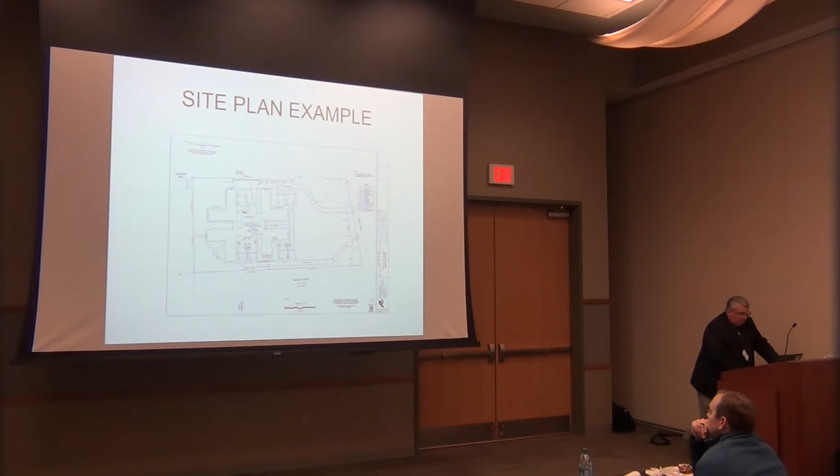The site plan again shows the location of the project. This is the senior living facility north of Cincinnati. I don't see a lot of utility information on here.

But by the time I get to my grading plan, I can see the stormwater pipes are shown on there, because usually this is a grading and drainage plan, so they're trying to help us understand. It looks like all that water is going to end up in that retention pond at the northeast corner of the plan, which I think is plan northwest.

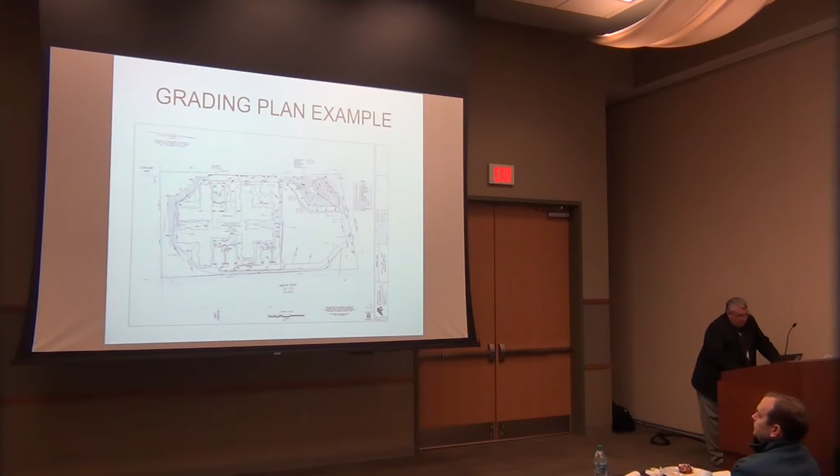So I can get a little bit of that information that I need. But now I'm on my utility plan, so now I can really see the layout and alignment of not only my storm sewer pipes, but my water and sanitary are in here as well. There might even be, it's kind of hard to see, but there's electricity coming off this pole right here into the site. So I can do the takeoff on that.

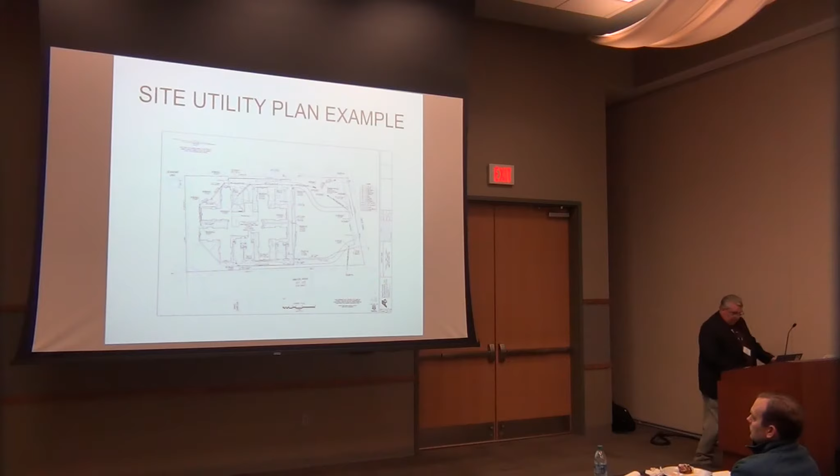So I get my linear dimensions on here, but my depths, I really want to rely on my profiles to get my depths. This really matters, because when we're putting pipes in the ground, we want to know how deep we have to dig. Because in theory, if you're digging a 12-foot deep sanitary sewer, it's going to cost more than a 6-foot deep sanitary, right? We're going to spend more time digging and less time putting pipes in the ground.

Really common sense principle. But what also matters is that soil type. So if we're digging through, let's say, real rocky soil, it's probably going to take us longer to dig through that than maybe through a clay soil. So we may not have to worry about over digging, because the vertical part of the trench is going to be easier to do because it's rock. It's going to hold itself in place together. It's going to take longer to dig it, but the trench is going to hold itself in place.

If we're digging through a granular or a sandy type soil, what's the problem? It's always going to want to cave in on itself, because granular material doesn't hold itself together. It's a function of its moisture content and a lot of other things, like silt content. So if I'm constantly having to re-dig that trench, that's a lot more digging that I'm going to have to do, but it's also a lot more backfill that I have to do as well. And even if you can use the same material as backfill because it's granular, you still have that much more time.

So everything really comes down to a function of time. So I want to know how deep my utilities are. That's a big thing for me, is how deep are they? Because the shallower they are, and the more competent the soil, the faster I can go.

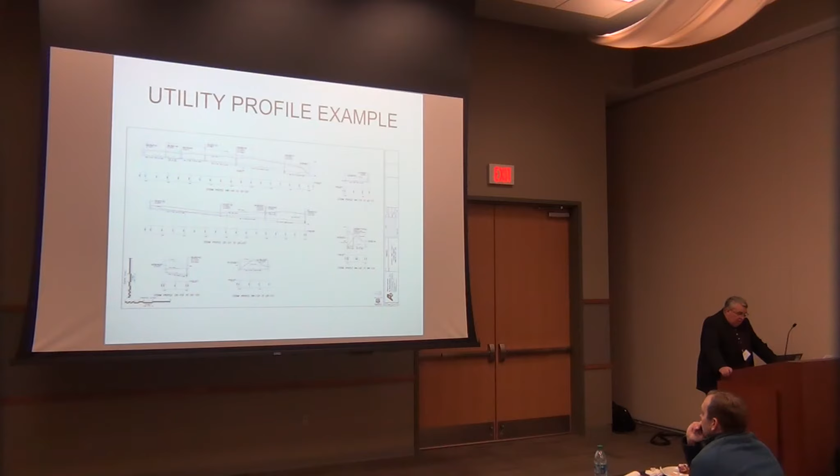These are drawn with a horizontal and vertical scale that are oftentimes different, but it would allow me to calculate my trenching volume, though I can't get my complete trenching information off of here. You say to yourself, yeah Dan, you can get the length of your trench and you can get the depth of it off the profile. What's the missing dimension?

I got length and I got depth. What am I missing? Yeah, the width of my trench. And what's going to impact the width of my trench? The soils. What's the first thing that's going to impact the width of my trench? Pipe size, right.

And then I've got to leave myself room on either side of the pipe to work, right? I can't have a 24-inch pipe and a 24-inch wide trench. There's no room for a pipe layer to stand in the trench. So I probably need maybe 1.5 or 2 feet. So whatever my pipe size is, I can add at least 3 feet to my trench, right?

But that's going to, again, depend on soil type, because if the soil is competent and holds itself together better, I can do that. But if that soil is not competent, and I fear that it's going to cave in, I might put a box in there. Even if it's shallow, I still might put a trench box in it to hold the walls up while I put my pipe in.

But if the soil is such that it's dangerous to put somebody in there, if it's deep enough, OSHA says it's 4 feet, right? So if it's deeper than 4 feet, I've got to have shoring and I have to have a means of egress.

If I'm putting a box in there, the first thing that impacts the width of my trench is how wide my trench box is. So these are all things you have to think about. But it really comes down to soil type as well. Size of pipe and soil type, because that's going to really inform how wide your trench is.

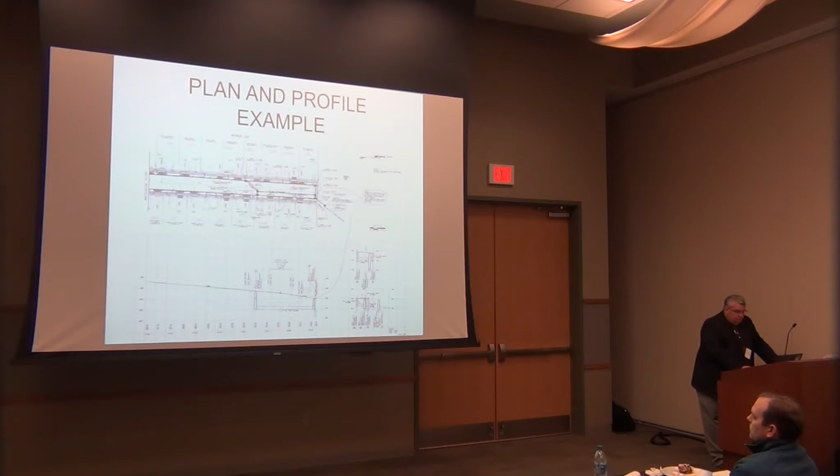Anywho, when you go to buy the pipe, your pipe is sold in different lengths. A ductile iron pipe for water mains is sold in 18-foot lengths. HDPE pipe, which is high-density polyethylene plastic pipe, we normally see it for storm sewer. That is sold in 20-foot sticks, dimensions.

So you may end up having to buy more pipe than you actually need for your trench, because you might have a piece that requires 1.8 sticks of pipe, and you're not going to buy 8/10 of a piece of pipe. You're going to buy the whole piece, right? Yeah. So it'll help you get the accurate dimension of how much pipe that you need.

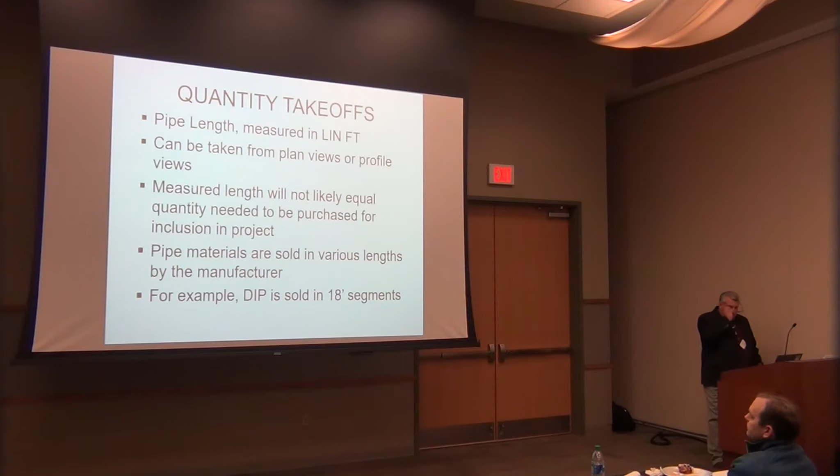Well, let's jump back to the trenching excavation and how we get there. So we'll kind of talk about this a little bit. There are different trench shapes or trench types that we can use to offset the depth to make it safe. And those include straight trenches, wye trenches, vee trenches, benched or stepped. I'll show you all these in just a second.

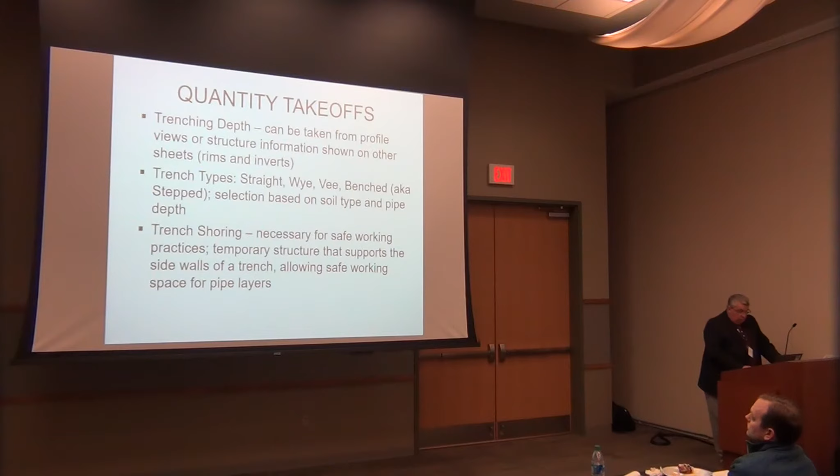Or we may have to put a trench box in there to keep things safe, and I've got a picture of that coming up. So there's a step-by-step process to get our trench volumes. The first thing is... and I don't know why it skipped step 1. What the heck?

There it is. So first of all, we're going to determine what type of trench do we need. What shape does it need to be in? And that's going to be informed by depth, soil type, size of pipe, lots of those things.

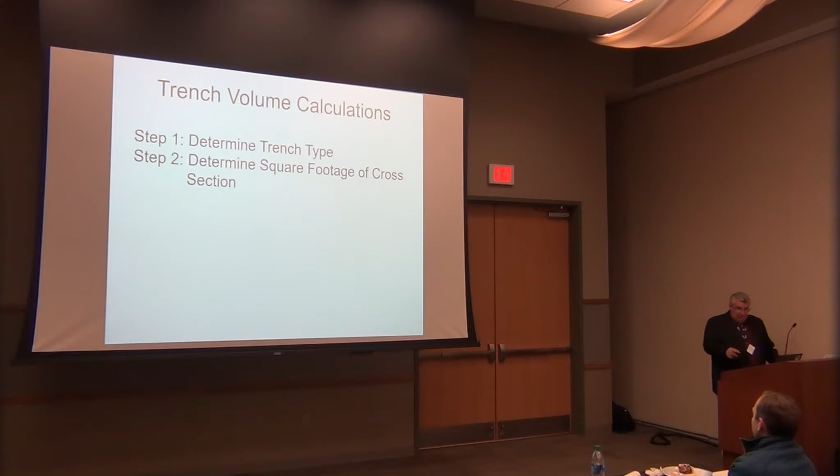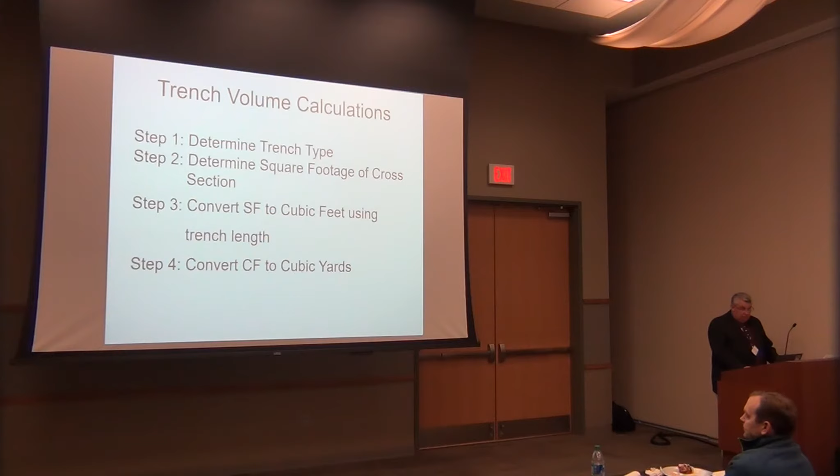Once we know that, then we're going to try to get the cross-sectional area of that trench. What is the area of that trench in cross-section, so we can multiply it by the trench length to get square foot to cubic feet. So once we have feet times feet times feet, we've got cubic feet, and then we know how much excavation we have, and then we also know how much backfill we need prior to backing out the pipe.

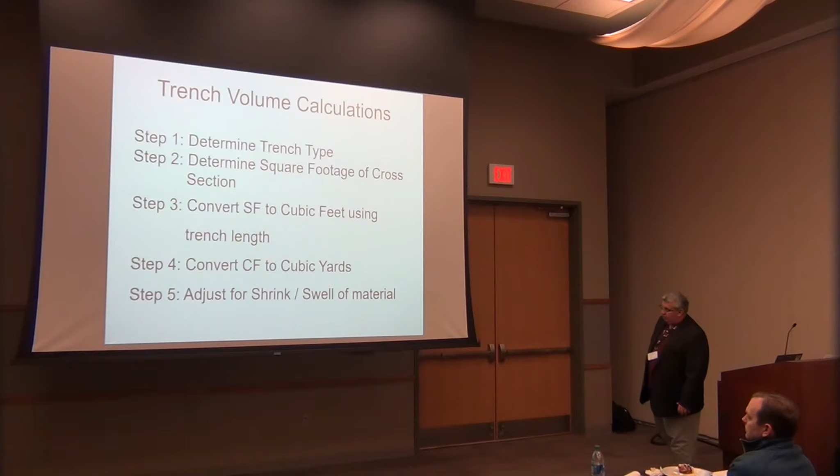Those are kind of showing up on my screen here, so it looks right. Okay, so how about if we... and then you're going to need, just like in mass excavation, you're going to need to adjust for shrink or swell. That matters as well, especially on the backfill side.

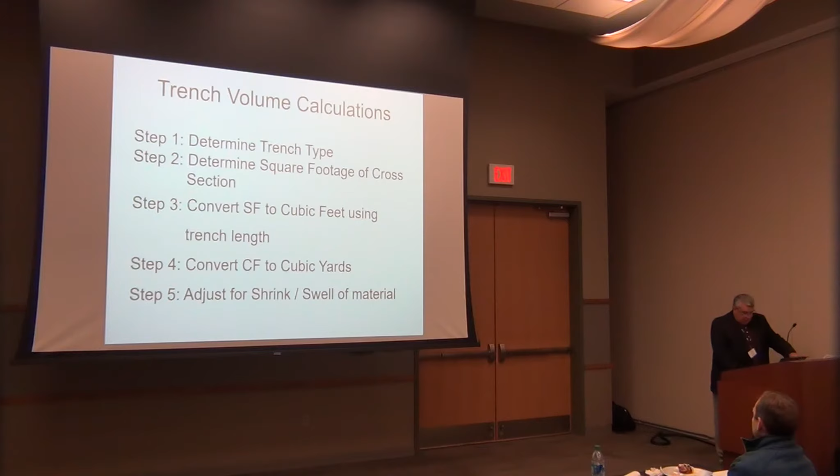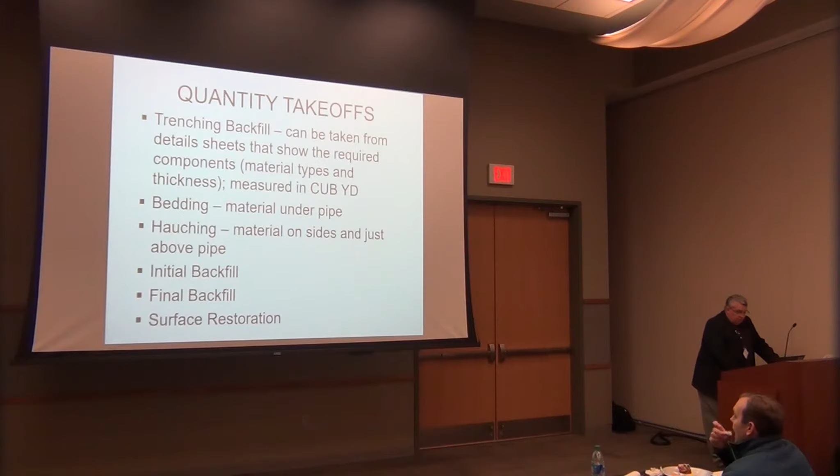So let's look at some trench types, okay? First of all, the main parts of a trench: the backfill is going to be the bedding, the haunching, initial, final backfill, and then the surface restoration. And the next slide shows that pretty good.

So we have the pipe sitting on some type of bedding. So even if our pipe is shown to be at one elevation, we have to over-dig the bottom of that trench to put the bedding in, right?

The specs might say set sewer pipe on a 6-inch bed of mason sand or something like that. So that's not going to show up on the profile as an invert. What's going to show up is what the invert is, what the elevation of the bottom of the pipe is. So we have to make sure that we account for that overdig.

That initial backfill right around the pipe that really holds the pipe into place, the engineers call that haunching. And then above that is the initial backfill. So that haunching and that initial backfill will completely surround that pipe and keep it into place. They're probably going to be something granular.

It's going to be something that you can compact depending on the trench width. It could be a plate compactor, it could be a walk-behind roller compactor—they make those pretty skinny. Or if it's deep enough or wide enough, you might be able to get a whole regular size compactor down in the trench. So you're going to put some compaction on it, and then above that is going to be your final backfill.

And again, you'll look at the specs to do that. The specs will probably refer you back to the drawing where there will be a typical backfill utility pipe section drawing that is unique to that jurisdiction.

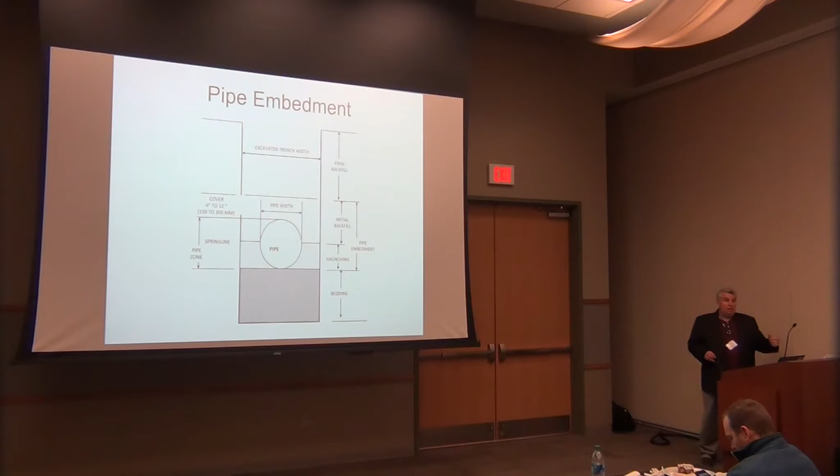So you have to worry about how much trench excavation I've generated, and how much of it you're going to use for backfill. And then whatever's left over, it's going to go someplace, right? Maybe it's going to go to the mass fill in the job, or if it's an export job already, you don't need the trench spoils for the mass fill, you're going to pay to get rid of it.

So those are the different components of a typical trench backfill. We've got bedding, haunching, initial, and final backfill.

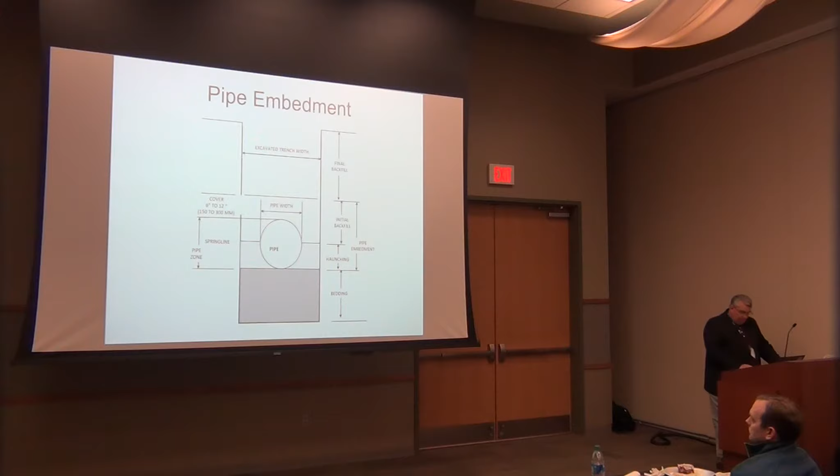Okay, any questions about that?

So it's a pretty straightforward trench. You wish every trench could be a straight trench, because now you're digging a certain width and a certain depth, and it's simple. But not all trenches are this simple—most of them are not.

Pretty simple concept. The thing I love about estimating, the math anyway, is that I don't really have to have been a math major in college. I don't really need to know that much calculus. I need to know some geometry. But most of the math that I use as an estimator, I probably learned it before I got to high school. It's pretty simple—the math is pretty simple.

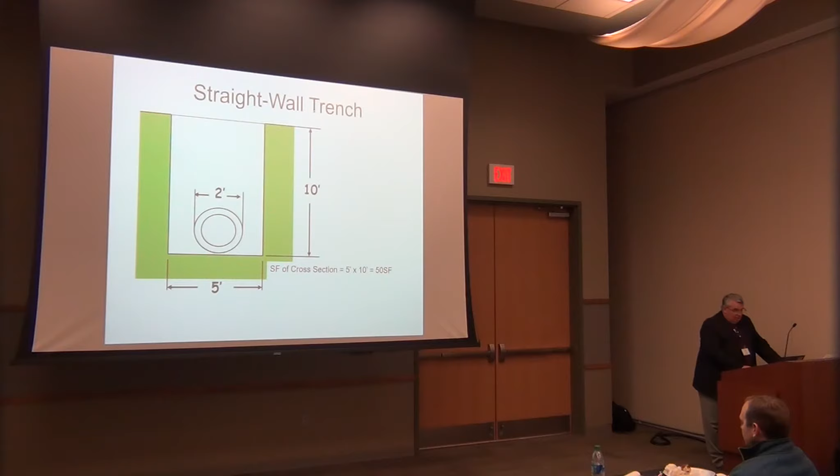I like that about estimating. And even though I consider myself a math guy, I'm not a high-level math guy. I'm a low-level math guy. That's what you need to be as an estimator.

Okay, here I just had to hit the button that would have done the math for me. So it's on the slide already, I forgot that I put that in there. So anywho, that's how you do that.

So that's a straight wall trench. That's way too deep to put anybody in. We would have to have a trench box for that.

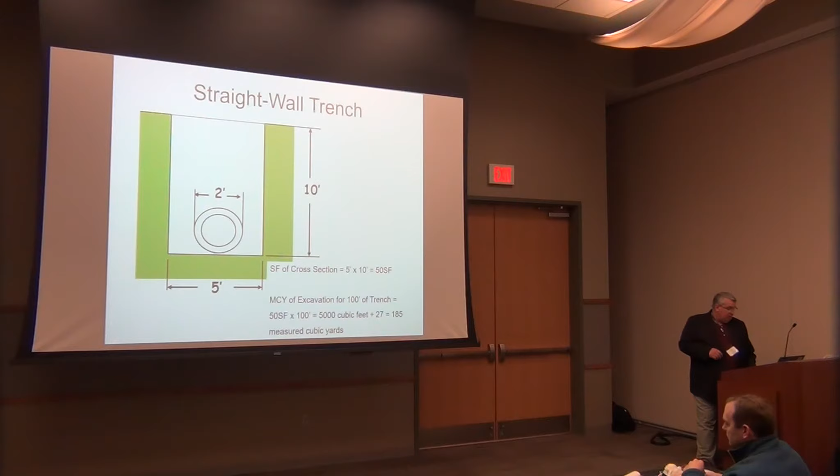Now, one way to mitigate that is to shape that trench. My sides aren't vertical here, right? So now I made a V out of it, and I'm going to make that into some sort of a shape where it's not a straight vertical wall. And now I'm going to worry about what my soil type is, depending on how far back I can over-dig the top of my trench so the wall isn't vertical.

That would be a function of soil type. A nice lean clay, you could probably get away with something that's not too expansive. None of that yellow clay or fat clay, that probably wouldn't be real good. You could probably get away with something like this if it was a mixture of lean clay and maybe some rock.

But again, if I'm 10 feet deep, I've got to have some way to protect the workers in that trench. So I'm going to keep emphasizing that.

And again, now the math is a little different. Now I've got my overall rectangle, but now I've got pieces of 2 triangles to do as well. So I'm getting my trench cross-sectional area, and then I'm going to measure it by however long it is. You guys get the picture.

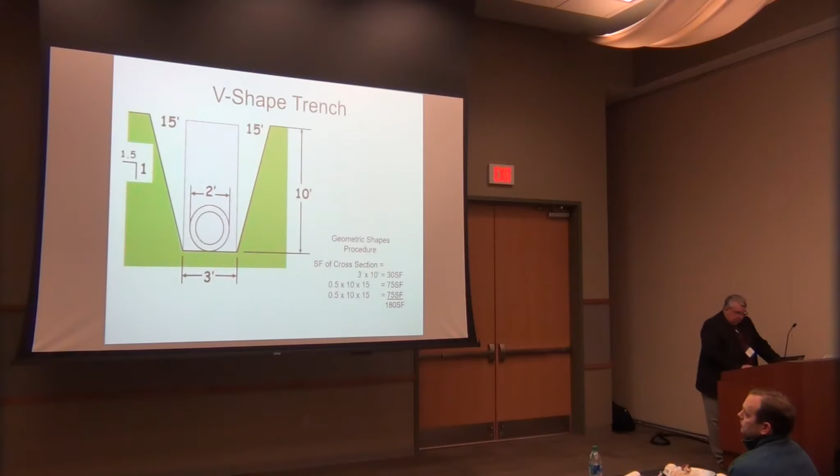My next trench method is a Y. I've got a vertical piece at the bottom. They show 5 feet here, but if that vertical piece at the bottom is 4 feet, I theoretically don't have to protect that because the vertical component is only 4. But now I've got a bench in there. I've got a 2-foot wide bench on each side, and then I'm going up at some sort of a ratio.

So now my math gets a little more complicated. This might work for me. So now my math is a little different. Now I've got a rectangle, and then I still have—actually I have 2 rectangles and 2 triangles. So I've got four individual things to measure there.

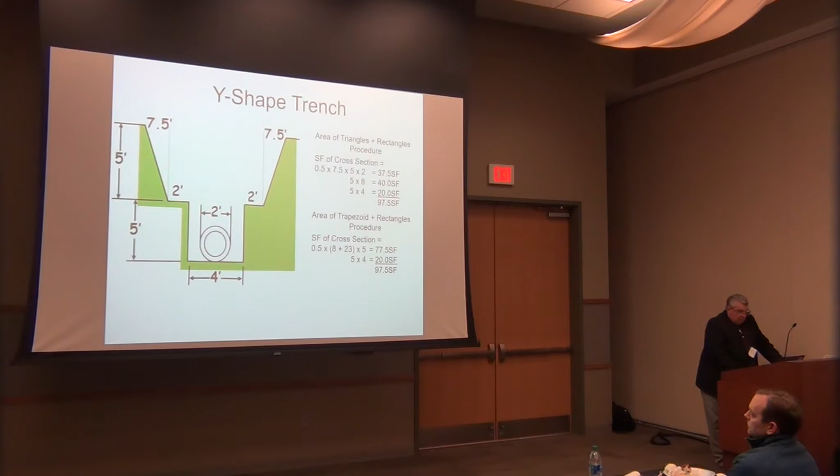Now I've got a T. Now I've got nothing but vertical components of this. I've got a really wide bench on this. I don't know why we've got 9 feet in here. Obviously, I ripped these off from somebody, with their permission, of course.

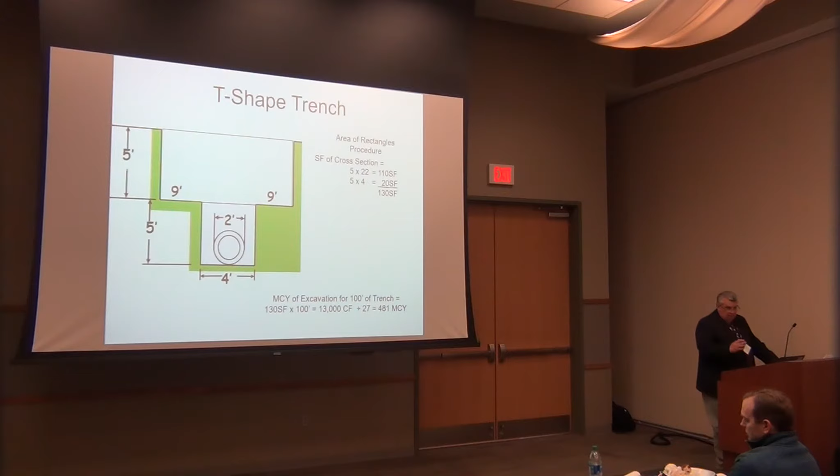So, but these are the dimensions that we have. So the bottom line is we've got to come up with that cross-sectional area and then multiply it by the length of our trench. Real simple stuff. Any questions about that? In reality, how are most trenches dug?

Most of them are either benched or they're straight with a box. Is anyone going to take the time to dig something like this that's real elaborate? Now, you might if the job really dictates it, but what's the fastest and easiest thing for a contractor to do? It's just a straight trench with a box in it.

And let's say your box is 8 feet tall and your trench is 12 feet deep. Now I've got 4 feet above that. What do I do above that? I'm going to lay that back, or I'm going to bench it, but now my extra excavation is minimized because I've got the box in there.

But what does the box do, other than keep people safe? How does it impact our cost? Rental rates, yeah. Everybody doesn't own them. If you don't own it, you've got to rent it, but what does it do to your production rate? It slows it down quite a bit, because now I am pulling that box forward in the ditch.

And what's the right way to do that? Is it to pull it forward? Is it to pick it up and put it back down? It really depends on the job. It really depends on the foreman and crew as to the right way to do it.

I want to tell everybody a quick horror story. And this isn't really funny because it involves somebody losing their life. But there's a friend of mine in Cincinnati who works for an excavating contractor. He was their estimator when this accident happened. The crew was pulling the box forward in the ditch.

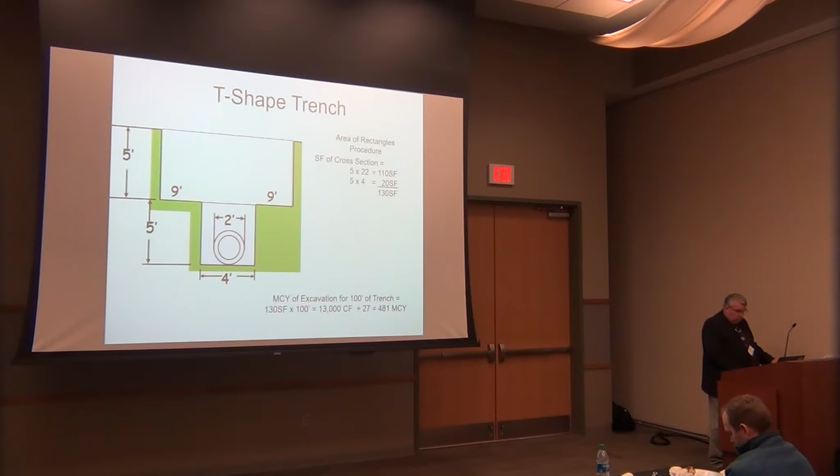So, anyhow, now I've generated all these spoils. What do I do with them? I have to get rid of them somehow.

If I have to truck them off the job site, if they're not needed on the site for any other purpose, now they are adding dollars to my cost, because I'm putting them on a truck and now they're going away. I may have to pay to get rid of them, but even if I don't have to pay, I might have a free dump site, but I might have to push that off. So now I might have some equipment time.

So things to think about. My bedding and backfill materials are definitely something I'm going to have to buy. Those are sold by the ton, but we take them off by the cubic yard. So we have to know what the appropriate weight to volume ratio is.

So what do you guys think the weight to volume ratio, tons to cubic yard, is for, say, mason sand? Anybody got a guess? I have a number that I use. 1.5? Yeah, that's the number I use, Rick. 1.5 tons per cubic yard.

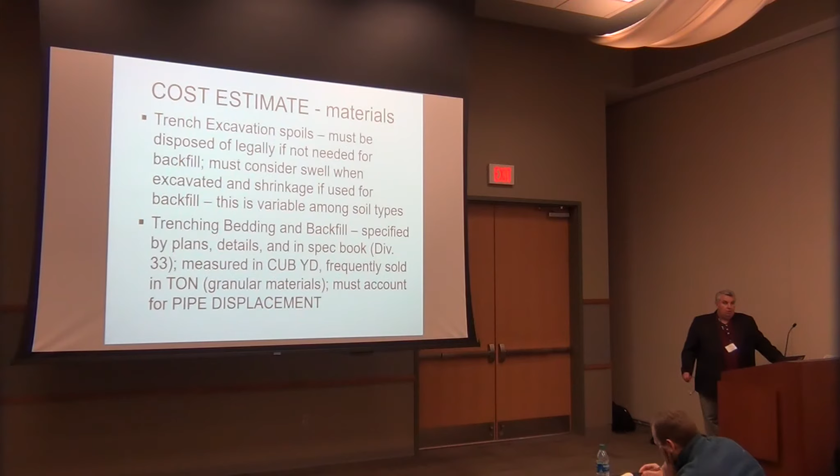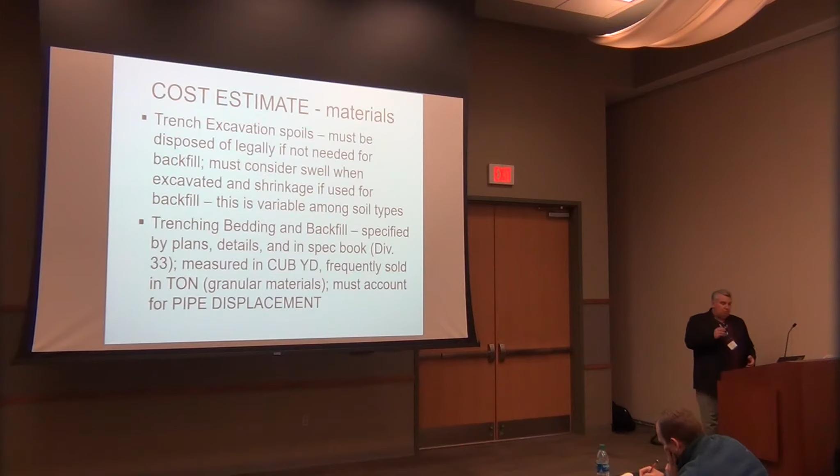But then I'll put a waste factor on top of that. Why do we put waste factors in on backfill? You're going to lose a lot of it. Yeah, when are you going to lose the backfill material? You're going to lose it in transit between the stockpile and the trench, as that operator drives that loader over uneven terrain. Some of it's going to bounce out of the bucket, and you're not going to recover that. You've got to put some sort of waste factor in. So that's important as well.

My materials, my pipe, I'm going to buy that by the linear feet. If I have to use flowable backfill, I'm going to buy that by the cubic yard. Most ready-mix companies will also sell a flowable backfill product that sets up fast. The nice thing about flowable backfill is it fills in every little void and you're not going to have any settlement. You frequently see that spec in urban areas where you're digging up an existing city street and the authority having jurisdiction doesn't want any settlement, so they'll spec flowable backfill.

That's not cheap. I don't know what it's going for out here, but back home it's about 120 bucks a cubic yard. And I'm old enough to remember when it was about 30 bucks a cubic yard, so it wasn't that long ago. And then if I have fittings like bends, Ys, Ts, connections, or valves, I want to buy those by the each, which means my takeoff is going to get kind of intricate, because especially if I'm estimating the cost of downspout connections, if I'm hooking up a roof drain system, that's a small diameter pipe, maybe 10 or 12 inches, usually 6 or 8 inches.

Every place that goes up to a downspout connection, I've got a Y in the line, then the line that goes over to connect to it, then maybe 45s, maybe a clean out in there. All those little fittings have to be accounted for, and those aren't necessarily cheap, so you've got to account for those as well. But I'm buying those by the each.

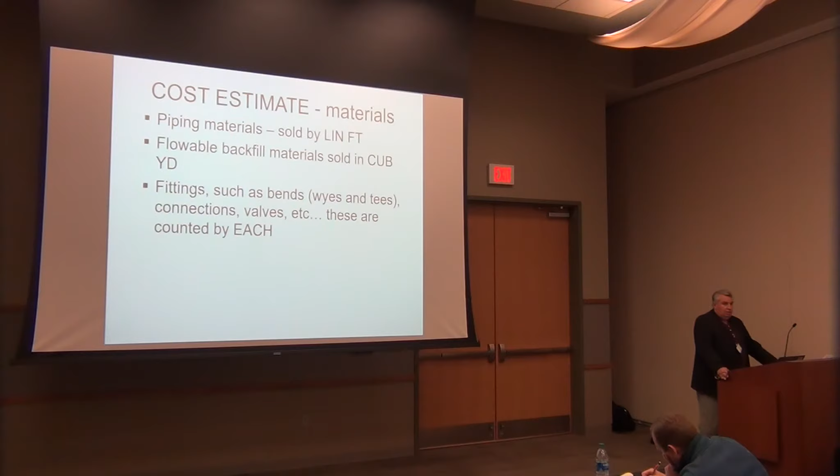I was doing a job in Pensacola - we were doing a 48-inch main that had 6 turns in it, and there was a lot of concrete in thrust blocks. I bet each thrust block was probably 5 or 6 yards. So that matters. You ever seen one reinforced? Thrust blocks were reinforced, where they had to be formed also.

Speaking of other things that can add cost to your job - other miscellaneous costs can include lumber for shoring if you're going to shore a trench with some lumber instead of a trench box. If you're patching into an existing structure, you're going to have some bagged concrete mix to patch those holes. You're going to have to buy whatever adhesives or lubricants you need to join pipes together if they're gasketed. If you have restrained joints on a water line, those are what they call mega lugs or things like that.

That's a brand name, but now you're physically connecting those pipes with bolts - you're not just gasketing them together. That takes time, slows your production down. But you normally see that where you see thrust blocks on a pressurized line like a water main. Sometimes you'll see those on force mains as well, because those run under pressure too.

But there could be other costs depending on the job - you could have saw cutting, core drilling, disposal fees, water delivery charges. The big thing everybody forgets about on saw cutting - this is a real thing, I don't know if it's a thing out here, but it is in Cincinnati - the city is really strict about cleaning up your saw cut slurry, because when that stuff dries it makes a god-awful mess, and if it gets on something, it stays on something. So they're really big sticklers about making sure you clean up your slurry from saw cutting.

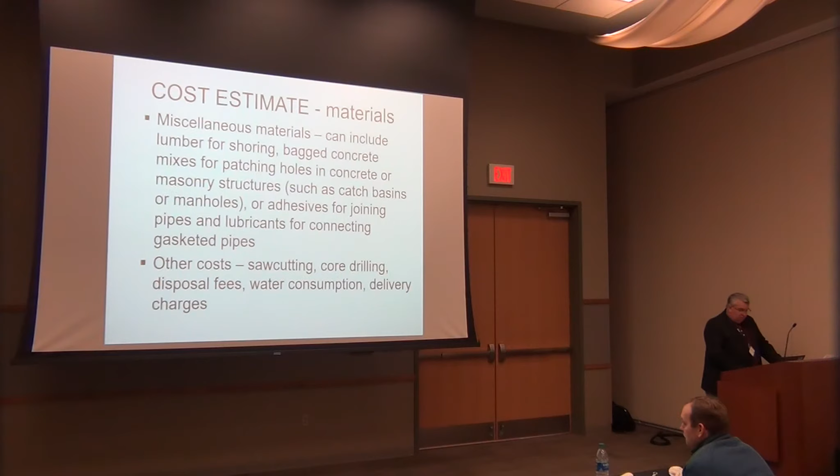Okay, any questions about that?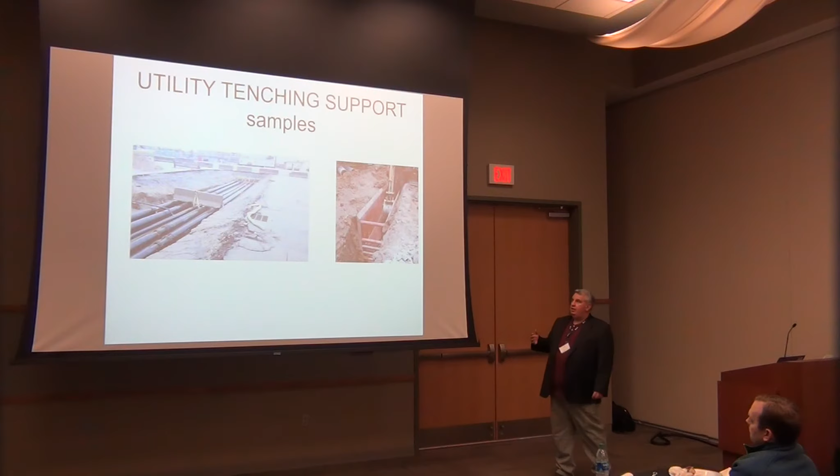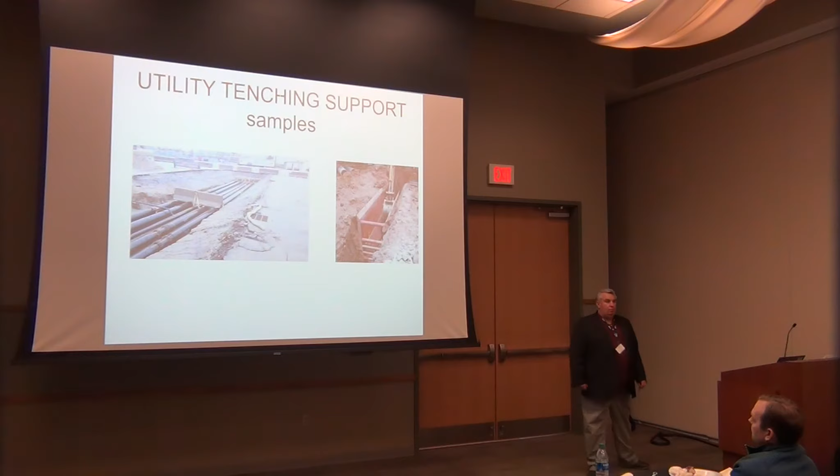But in any event, if something starts to cave in, that box is still going to catch it. And I'm talking about inches here, like baseball - it's a game of inches. It's maybe even just a couple of inches wider, but that would still protect the workers while allowing the box to be a little more easily moved. I think my buddy's company probably dug the thing just as wide as it needed to be and not any wider, and sadly it had a tragic result.

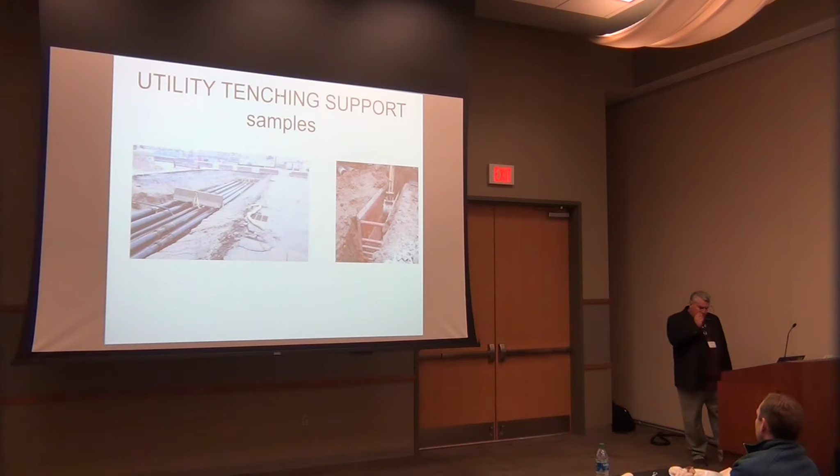So, okay, thanks guys. It's a good discussion.

Let's talk about the equipment we're going to select. Of course, we're going to be digging with something like a power shovel, a track hoe, or a backhoe. I've worked on a lot of city Cincinnati water main projects, and you're always working on existing hard surface pavement, and the city won't let you put a metal track machine on one of their streets.

Even if you're going to mill and resurface it, they want to see a rubber track machine on there. So you see a lot of contractors going with equipment spreads using smaller track hoes that don't have to have the real deep digging capacity. They'll still dig 10 or 12 feet deep, but they're rubber track, they're lighter, and then instead of a big rubber tire loader, you see a lot of these really beefed up skid steer loaders on these urban projects.

Those job site conditions, and sometimes the owner's requirements, are going to help inform what type of equipment we're going to use. We also want to make sure we have enough horsepower to dig through the type of soil we expect to encounter. We're not going to dig a 20-foot deep sanitary sewer with a bobcat with a backhoe attachment on it—it just doesn't have the horsepower. We're going to have something like a Caterpillar 330, maybe a 320, something that's got enough horsepower.

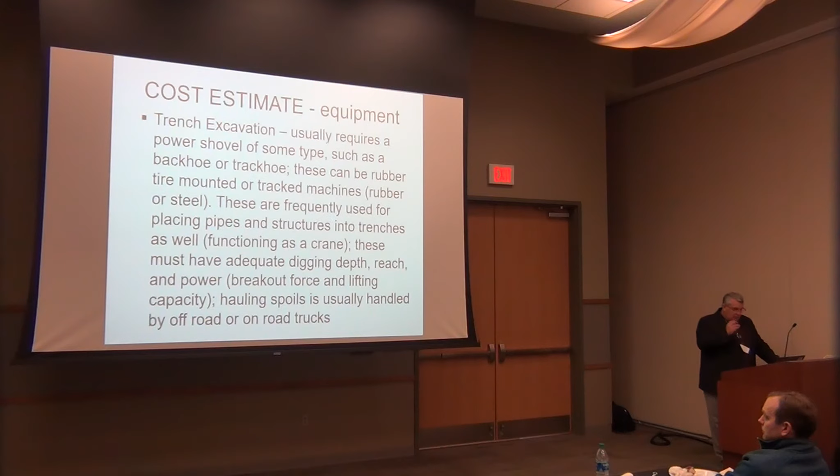When we get on the backfill side, now we need something with a bucket that we can use to shuttle material from a stockpile to the trench itself. But it's one thing to get it into the trench, then we've got to grade and compact it. A lot of times you'll see the track hoe involved in the backfill operation because they are spreading it. You don't want to put a lift of backfill material in that's 3 or 4 feet thick and try to compact that, because you're not going to get any good compaction. So engineers will want to see a thin lift, somewhere 6 to 12 inches, that can easily be compacted with a conventional piece of equipment.

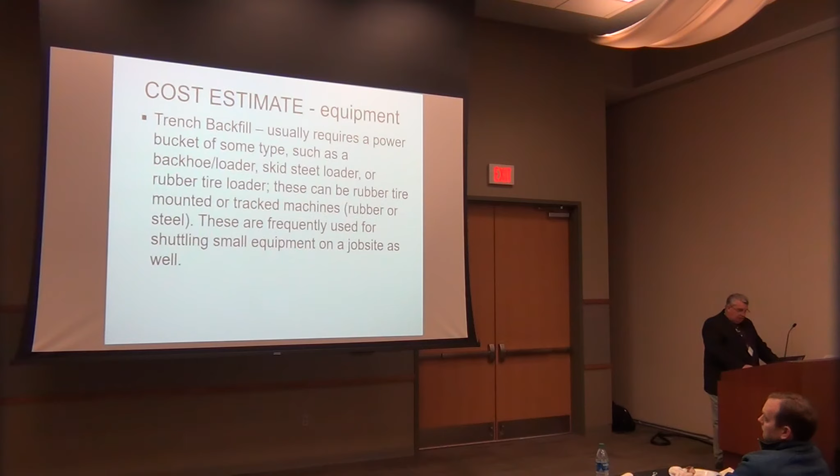So in backfill, we're going to usually see some sort of skid loader, a rubber tire loader, sometimes rubber tire backhoes—you don't see too many of those on job sites anymore, but they're still out there. And again, the width of our trench is going to inform what kind of backfill or compaction equipment we're going to use.

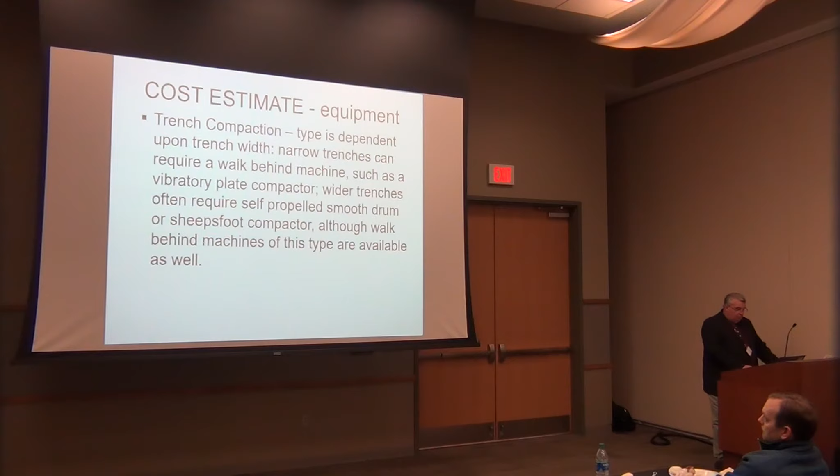Pretty simple concept, really—I'm digging a hole, I'm putting something in it, and then I'm covering it back up. That's the simple explanation. The more complicated explanation that we're trying to deliver as estimators is what is that going to cost, and there's all these different things that go into it.

Are there any specific words or items to look for that are kind of gotchas when you're reading the specs for backfill compaction or anything? They may actually specify the type of backfill or compaction equipment you have to use.

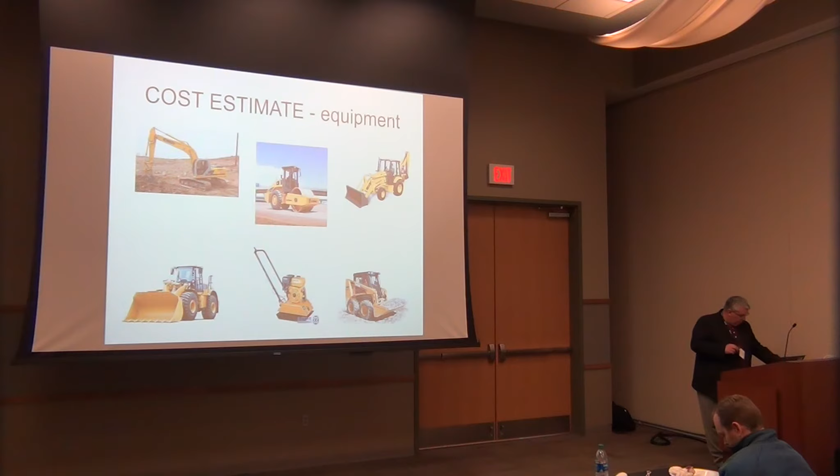Okay, we've got about 15 minutes left, which is good. So let's talk about labor classifications. Of course, we're going to have operators to run this equipment, but we're also going to have pipe layers and common laborers as well. We may have some other classifications depending on the job.

If we're in an urban area or working in the street, we're going to have maybe some flaggers. But the flaggers are probably going to be paid at a laborer's rate. It just depends on if it's a PW job or not. Everybody understand what prevailing wages are?

Okay, all right. The pipe layers are the ones that really make a difference on a site utility job. These are skilled laborers—they've got special knowledge of how to join pipes together, how to put fittings together, and they can do it fast and safely. They're used to working inside of trench boxes, and they are the key to getting the pipes in the ground. That's not to say a couple of smart laborers couldn't do it, but I'd much rather have a couple of skilled pipe layers on my crew doing that.

The laborers are going to do things like back trucks in under the hoe, or flag traffic, or they'll spot loads of granular material along the alignment of the pipe, far enough away from the edge of the ditch.

That's important. And what was your name? Gerald? Gerald. Okay, Gerald brought up.

If you're placing your spoils on the cut bank, they have to be far enough away so they don't easily fall back in the trench. Same thing goes if you're spotting backfill material along the alignment of your pipe. But you're probably going to have a laborer spot those trucks and do that type of thing.

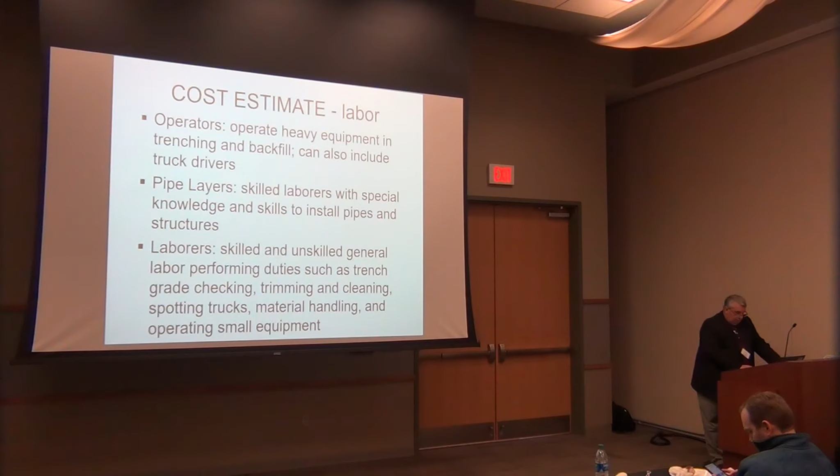Okay, any questions about that?

Okay, and then again, this is just the cost estimate one. This is the art part of estimating, getting that production rate right. So we want to know how much our crew can do in a given set of time, either per hour or per day. It's going to be unique to this particular job. You're not going to get the same production on every job, every time, because the characteristics of the job change. The deeper your trench is, the slower your production is going to be. The more you have to use trench boxes, shore the trench, or over dig, the less time you're actually putting pipe in. Those are the sorts of things that drive the cost up, because your production rate slows down.

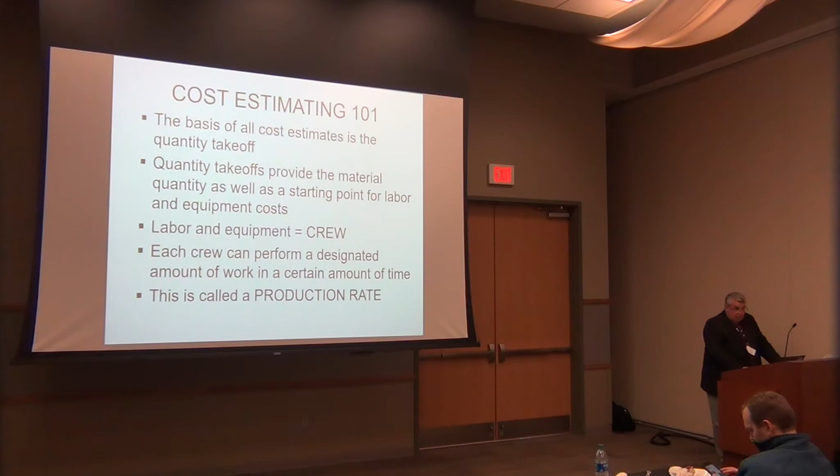Again, you're never going to have the engineer tell you what the production rate is. You're not going to find it in the spec book or anything like that. That's going to come from your own intuition. That's where you want to go ask the people that work in the field. Hey man, we're bidding this job and I could really use your help. How fast do you think we can go? And they'll remember some job they did 4 or 5 years ago. They said, you know what, we had this problem, but same size pipe, same material, same engineer, and we did like 180 feet a day.

That might be a good starting point, and then you run the math on 180 and see if it works. And if that's not working, maybe you do 150, and you keep playing with it until it gets right. That's why I like Excel so much, that you can do a lot of different flexible things with the cost estimate. So here, just to give you an example, I've got...

It turns out my production rate is 120 feet a day, and that's, you know, 2,400 feet. The math is real simple. I get 20 days worth of work.

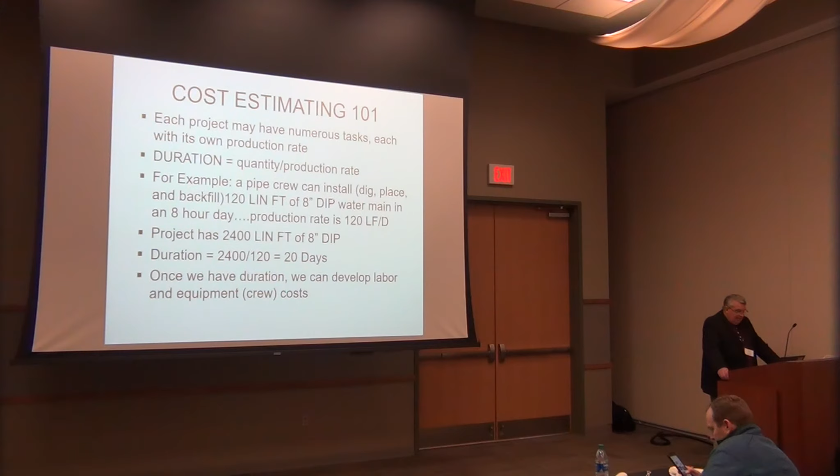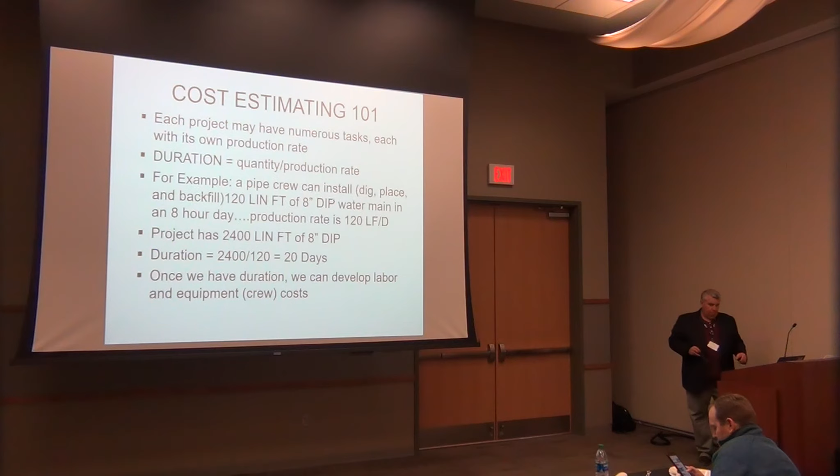Now you can have different tasks into that one activity of laying the pipe. You can separate out the trenching from the pipe laying, from the backfill. You could have a production rate for each one of those things. That's perfectly fine too, just depends on your method of doing it.

So again, the production rates are highly variable. They're impacted by a lot of different things: soil type, even things like how far am I from the disposal site? If I'm digging and loading into trucks, how fast are those trucks going to get back? What's my cycle time? If the dump site's far away, you got to have more trucks to do your job. Otherwise, your hoe is just going to be sitting there, and that's not good for anybody. If anybody's ever worked for a paving or utility contractor, there's nothing more frustrating than having your trucks get caught up in the very traffic jam that was caused by your own lane closure. It's ironic, but you get punished for doing your own work.

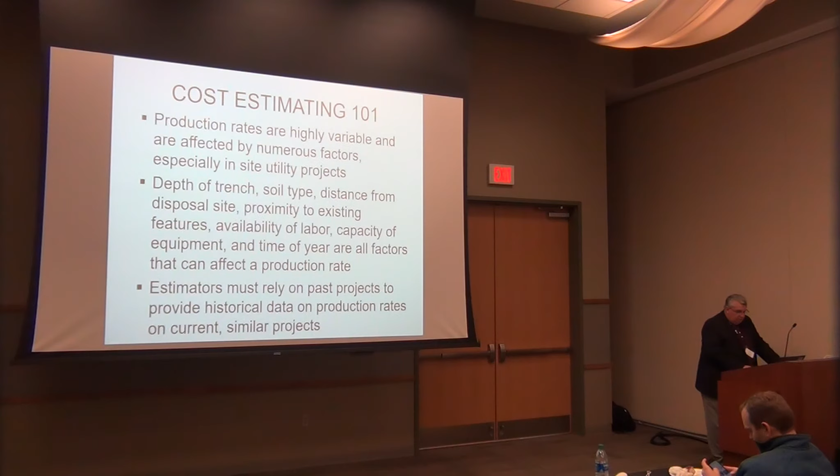So anyway, we all know as estimators that we want to rely on historical cost data, and we want to know as much as we can about previous jobs. So when we talk about labor and crew, I call these crew compositions, and some jobs need bigger crews than others. It just depends on the job. There's a lot of things that go into that selection of equipment and people that make up how you're going to do that job. I wish there was a rule of thumb that I could say, hey, every ductile iron water pipe under 12 inches needs 6 people. It's just not that simple. You got to look at every job like it's its own thing, which to me makes estimating really interesting, and that's, again, the art part of estimating.

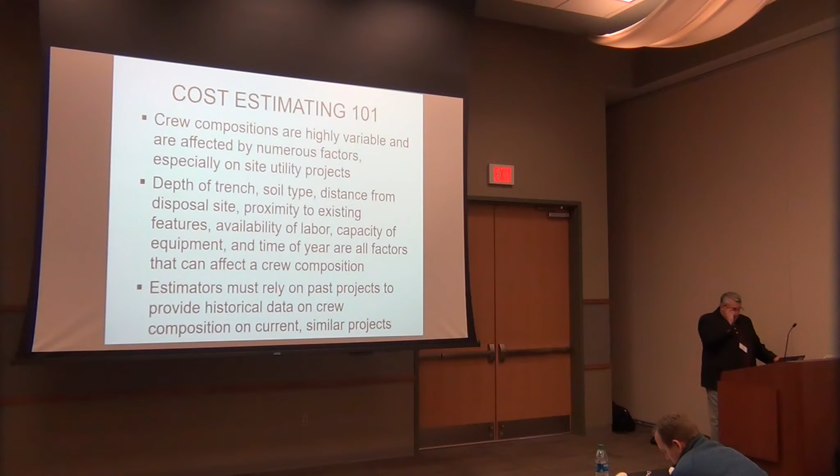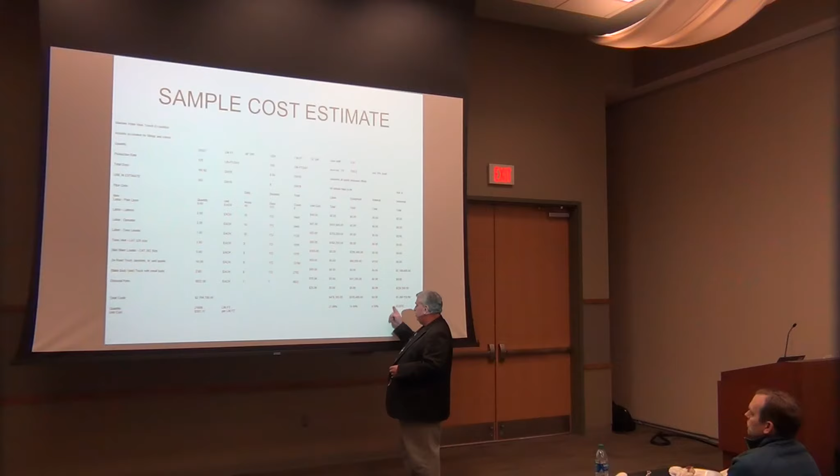That's just my raw cost, I don't have any markup or anything in here. But again, I like to put all my costs into the 4 different classifications: labor, equipment, materials, and then subs or incidentals. I like to track this down here and see what those percentages are, because over time I've developed my own rules of thumb. If my cost estimate comes out within those percentages, I feel like I'm pretty close to being right. It doesn't mean I won't change it, but that's just one way to do it.

This is from Excel. If anybody wants to see a copy of this, I'd be more than happy to give you that as well, you just have to ask.

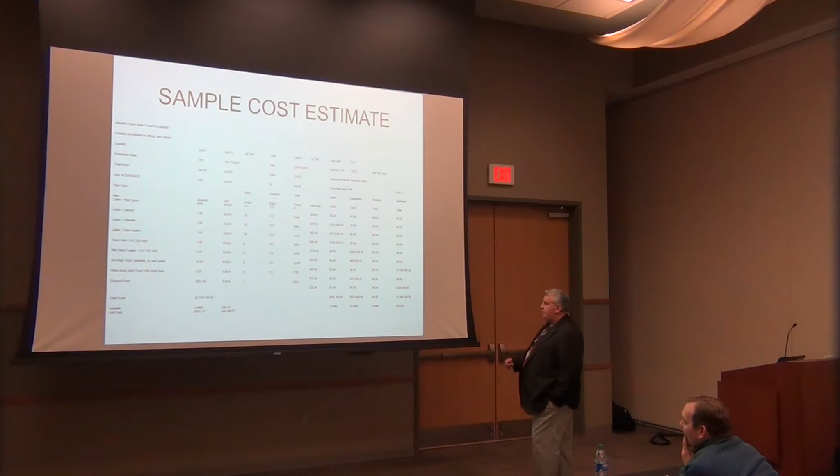Yeah, they're pretty much what you see up there. This job had no materials because it's just a trenching exercise. But my equipment is going to be someplace a little bit less than my labor on this, and my labor is the biggest chunk of it. I've got almost 22%. So I'm expecting my labor to be at least 20% and my equipment to be somewhat less than that. So I don't really have any hard numbers, but if this number is higher than this, then it makes me want to say, okay, why is that? And there might be something about the job.

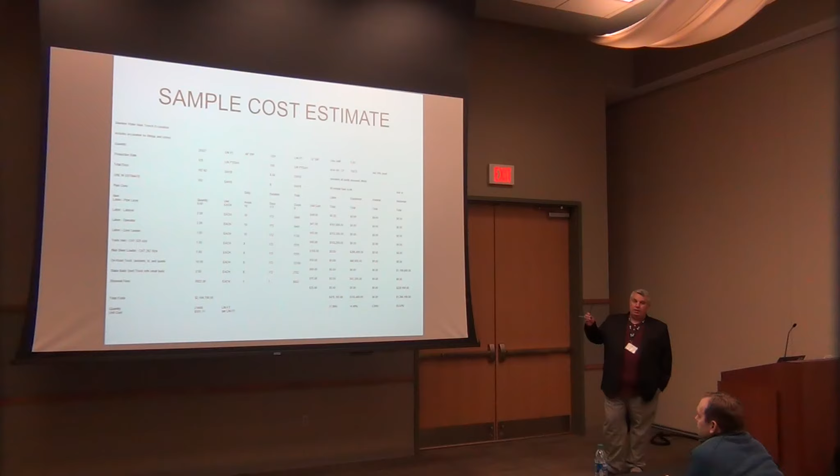You're not normally going to see that on a site utility job, but on an earthwork job those numbers might be flipped, because you can move a lot of dirt with a piece of equipment without having somebody on the ground watching it. So you might have four pieces of equipment, but only one laborer assigned to that. So your labor costs are going to be relatively inexpensive compared to your equipment. You got four dozers and scrapers working, yeah, they've got operators on them, but you don't have an equal ratio of people to equipment, and the equipment costs a lot more than the people do. So it just depends.

But I do like to pay attention to that stuff, because it helps you know if you're in the right ballpark or not. It doesn't mean you're wrong if you're not in that ballpark, but there's probably a reason for it. And you want to ask yourself those questions before a client asks you, or your boss asks you those questions.

As estimators, we want to have an explanation. Every decision we make, every number we come up with, every conclusion we arrive at, we have to explain to somebody. Someone's going to want to know, where'd you get that number? I've been asked that question a million times. Or it might not even be a number thing, it might be a nomenclature thing. I usually have a line in there called MOT, and I have general contractors that call me right away every time asking, what the hell is MOT? What's MOT? You guys all know.

Is that like a swag? No, but we'll cover that next.

It's maintenance of traffic. If I'm working in the street, I've got to have flaggers, I might have to have jersey barriers, I need to have barrels. That's my traffic control. So tell everybody what a swag is.

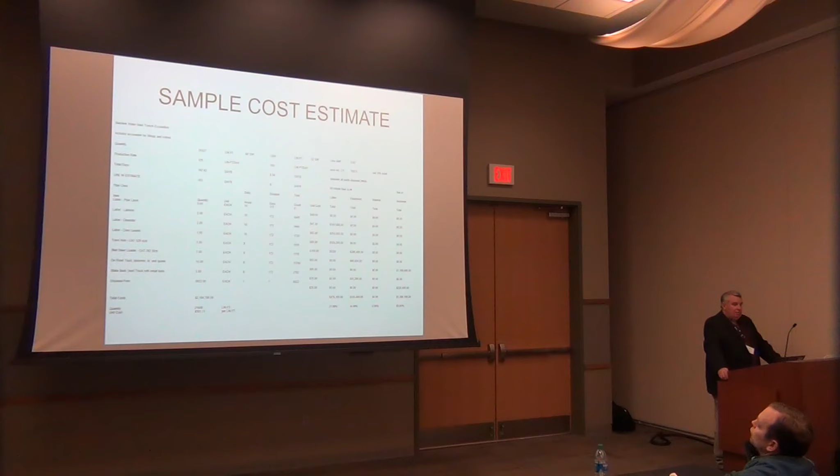So I'm not a big fan of the low bid. And the owners always have a clause up in Division 0 about what kind of bid they'll accept. They don't use the word low. What word do they use? The word I was looking for was responsible. They'll call it responsible bidding, and that's what makes it responsible bidding.

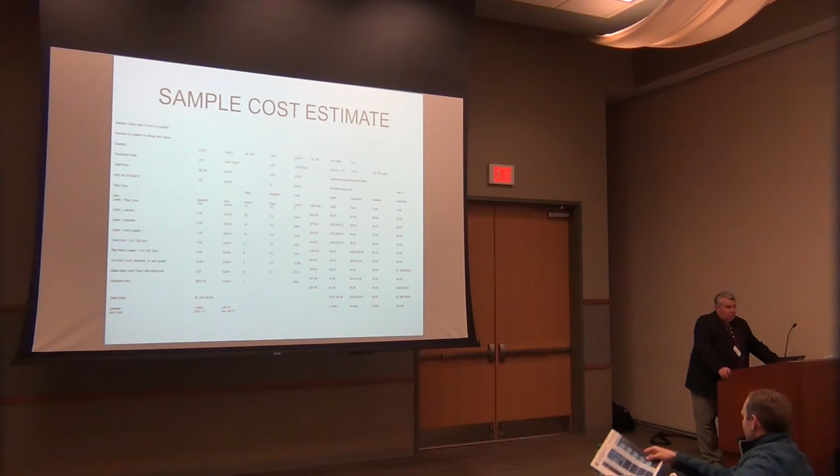I was just going to suggest the difference between the opinion of probable cost and the estimate is actually where you are in the process. What phase of design is it? I work on the owner side, so I was telling him, this is my opinion of probable cost, but you're not going to have an estimate until you have plans and specs. Right, until your design gets past DD, when you've got something you can really work with. We didn't talk about that today, levels of design. This is actually based off the SD set of plans, but they were pretty well developed, so I can do a pretty good takeoff on this particular one.